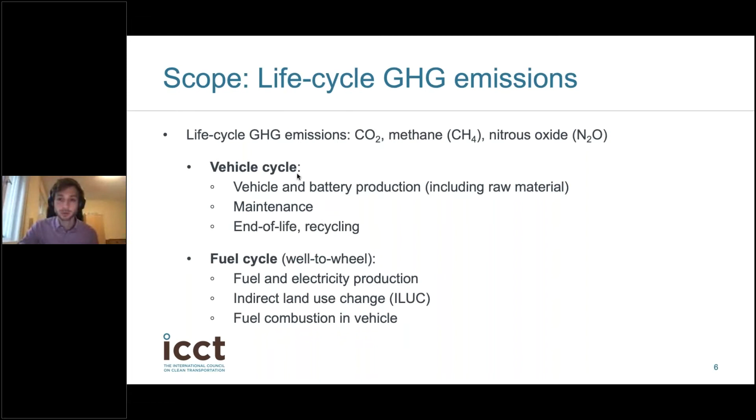And here we consider the improvement of the electricity mix that would result from a policy that would be aligned with the Paris Agreement of limiting global warming to 1.5 degrees C. So these are the best case and the worst case scenario, and we always show a range of values corresponding to these best case and worst case scenario.

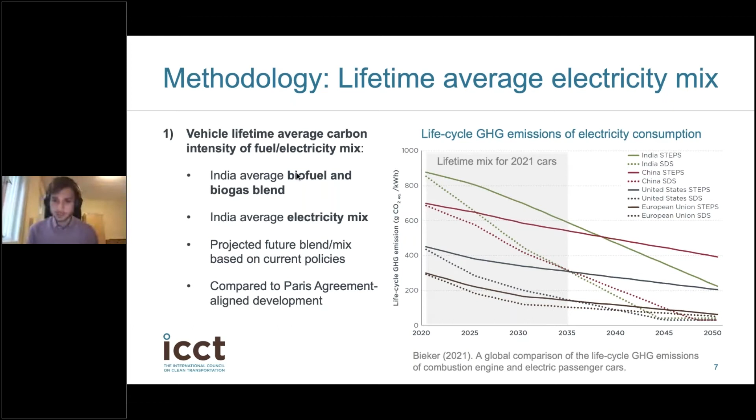And we do the same for the biofuel and biogas blend. Also here, we consider the improvement of the average blend of biofuels and biogas in India. And that brings me to the second point. When it comes to biofuels, it's important not to only look at the emissions of producing these fuels, so the direct emission of producing these fuels. It's also important to look at the indirect land use change emissions.

And for India, and for the future mix in India, we considered the improvement of the average gasoline and diesel blend according to the 2018 version of the National Policy on Biofuels. And in that version, the policy was focused on non-food-based biofuels. I'm not an expert on this, but I heard that there was some changes lately. Maybe we can discuss this later. But here we still consider the 2018 version. So we have for India assumed high shares of sustainable biofuels.

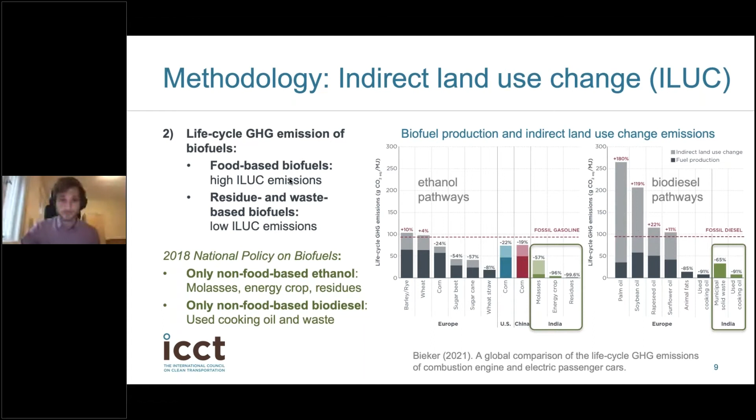The third point is the battery production, and here our data is lower than in comparable earlier studies, because we use the most recent data, which is based on industrial scale battery production, instead of estimations that are only based on pilot plants on battery scale production.

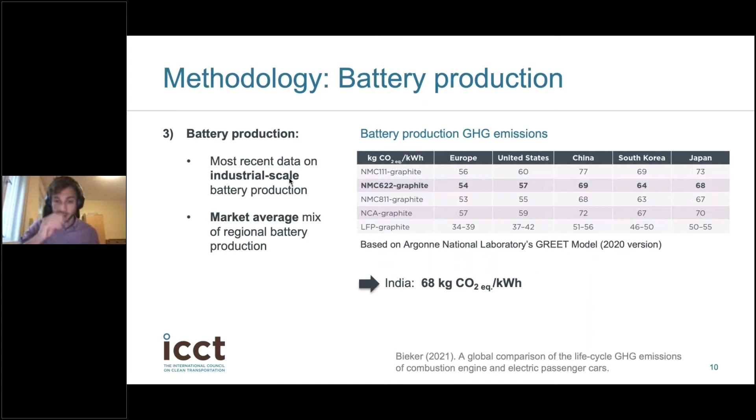The last point on the methodology is that we consider first methane leakage from natural gas and natural gas-based hydrogen pathways, which are blue and gray hydrogen. And here we consider that methane generally has 30 times higher global warming potential than CO2 when you account for a 100-year time frame.

But when you only look at the short-term 20-year time frame, the global warming potential of methane compared to CO2 is even higher, 3 times higher than for the 100-year time frame, and here it's like 85 times higher than CO2. So even small emissions of methane have a big impact here. So therefore, it's very important to look at the methane leakage emissions.

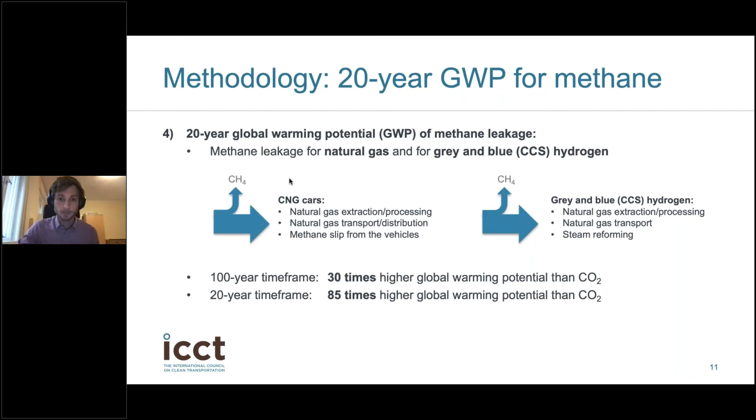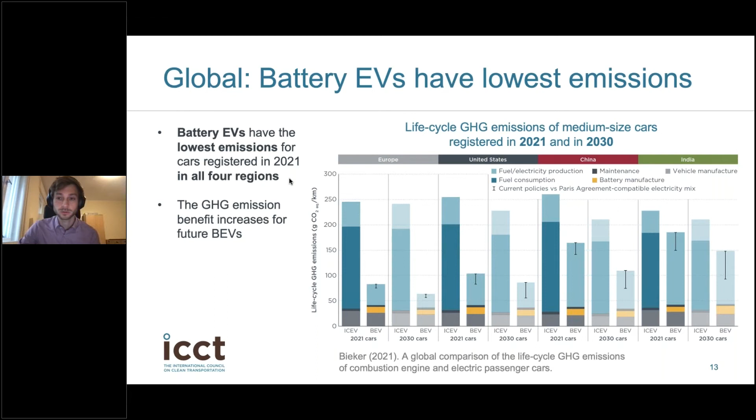When it comes to hydrogen powered fuel cell electric vehicles, it really depends on the kind of hydrogen you use. So you can use coal hydrogen or natural gas-based hydrogen. You can use natural gas-based hydrogen combined with CCS. You can use hydrogen produced from renewable electricity. Here I showed the 2 main pathways, which is hydrogen produced from natural gas, which is called gray hydrogen, and hydrogen produced from renewable electricity.

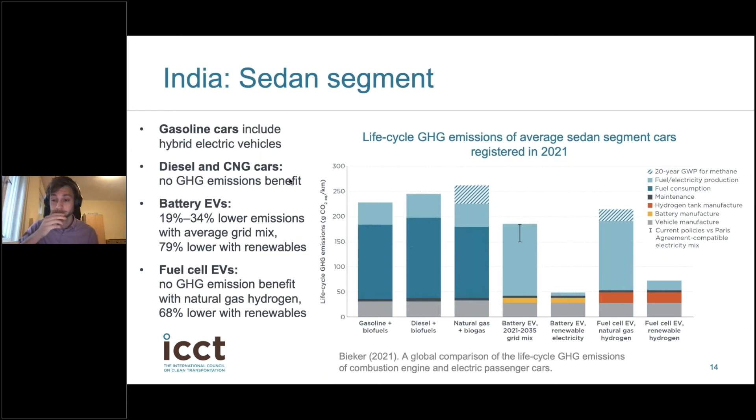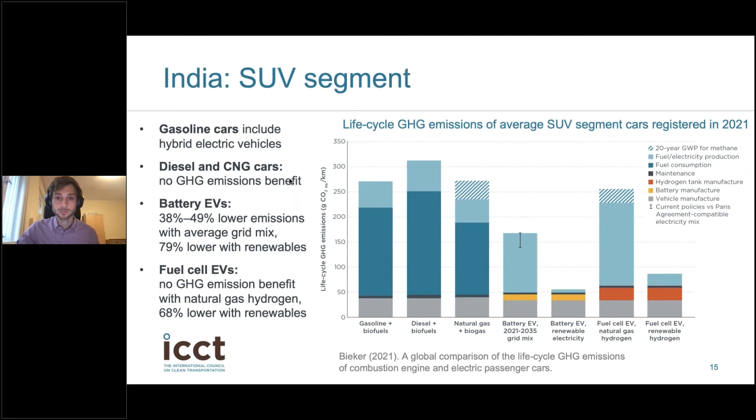So that might be surprising to some of you because hybrid electric vehicles usually show a higher reduction in fuel consumption on the paper, but in real world driving we found that the difference between the real world fuel consumption and the official test values is higher for HEVs, and that reduces the benefit a bit. But still, we can see a significant benefit. It's like 20 to 23% lower compared to conventional gasoline cars.

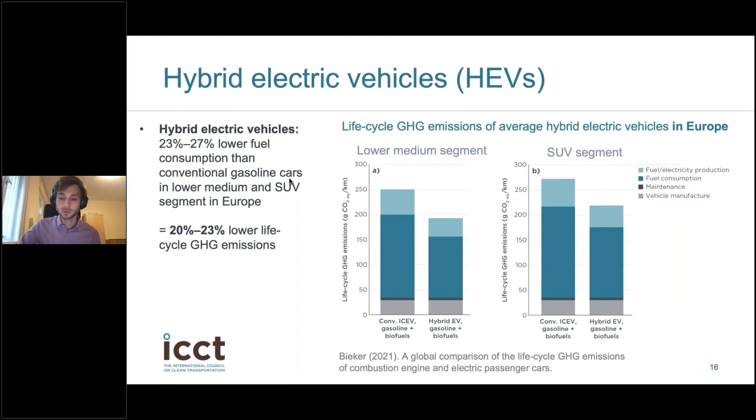And when we look into the future and we project how cars will look like in 2030, we see that for gasoline cars, the life cycle greenhouse gas emissions are lower than the numbers we had before. This is mainly due to the increasing share of sustainable, we assume this is only sustainable, ethanol in the average gasoline blend. And you can also see that for diesel and natural gas, you have lower greenhouse gas emissions than for cars today. But at the same time, you can see that the reductions are not that high actually. So we have 10%, 20% lower emissions, but not a large scale reduction.

This is different for battery electric vehicles. Here you see that for cars registered in 2030, we have 30 to 56% lower greenhouse gas emissions, which is an improvement. But you can also see that the range of uncertainty got bigger because the more we look into the future, the harder it is to see how the electricity mix will look like. So the truth will lie somewhere in between, we expect. And for natural gas and green electricity derived hydrogen, you see more or less unchanged figures here because these are just the pure pathways and not mixtures presented.

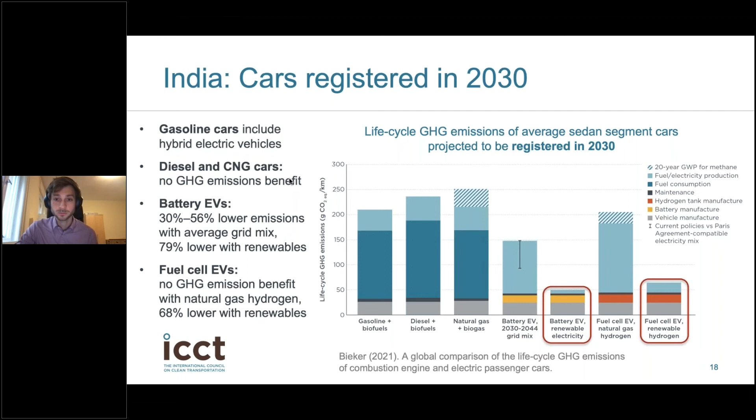But I want to compare the two of them a bit more in the next slide. And this next slide is about the energy consumption or the energy demand of these pathways. And here you see that when you produce green hydrogen from electricity, you have some inefficiency in this electrolysis process, but then you also need to compress and also transport the hydrogen, and then in the end you put it in the car and you need to re-electrify it, and also there in the fuel cell you have some energy losses.

And taken all together, the energy losses from hydrogen production, from transport and processing, and then finally the energy losses in the car from the fuel cell, you need 3 times more of the same electricity compared to battery electric vehicles. So in a world where we are limited with renewable electricity, it's important to consider this difference in energy intensity.

And then on the very, very right, you can see like a worst case scenario for this, which is the use of e-fuels. So e-fuels are produced from renewable electricity-based hydrogen and CO2 taken from the air. And this production process is very energy intensive. And then when you combust these fuels in the car, you have a very low efficiency compared to electric powertrains. And therefore you would need in the end 6 times more energy to drive the same distance with a similar car compared to electric vehicles.

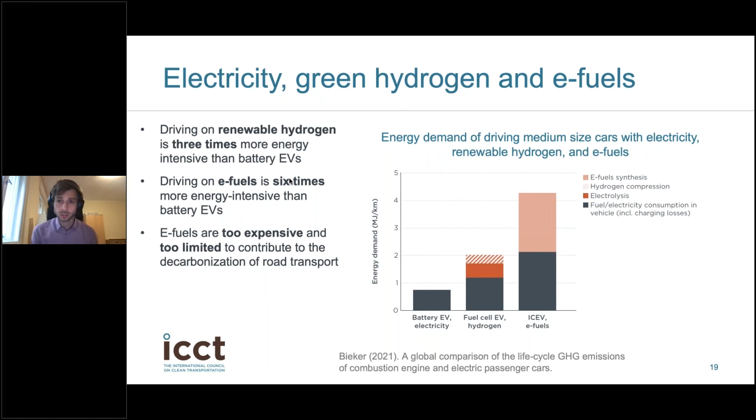Yeah, and here's a slide on motorcycles and scooters. You basically can see that all the results we see for passenger cars are also true for two-wheelers. So also here, as we can see on the left, for two-wheelers registered this year, we have significantly lower greenhouse gas emissions for electric motorcycles and electric scooters compared to combustion engine versions. And when you look into the future for scooters and motorcycles registered in 2030, you can see that this benefit increases. But you can also see that there's a slight improvement of the gasoline versions because of the higher share of sustainable ethanol we assumed.

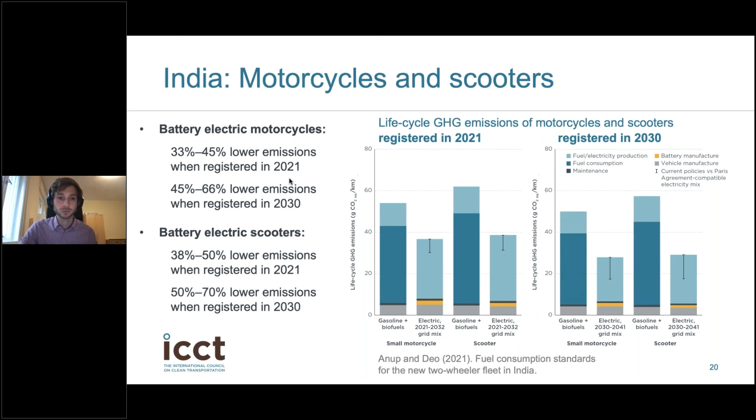Yeah, this leads me to the key messages. First of all, we found that for all 4 regions, including China, India, Europe, and the US, battery electric vehicles show the lowest life cycle greenhouse gas emissions when you consider their whole lifetime and not only look at the first year. Then we also see that when looking in the far future, only battery electric vehicles and hydrogen fuel cell electric vehicles have the potential to be near zero carbon, also on a life cycle basis. And we also see that there's no realistic pathway to decarbonize combustion engine vehicles.

So for e-fuels, I explained that in quite some detail, that they are too expensive and therefore projected to be too limited, but also are very inefficient to produce. And the same or a similar thing is true for sustainable biofuels. The more you want to produce them, the more expensive they are, and also here we have a limited availability. There's only so much you can produce sustainably. It's easy to scale up corn-based ethanol production, but this kind of ethanol does not provide large greenhouse gas emission reductions on a life cycle basis. You need to focus on sustainable biofuels, and here the supply is limited.

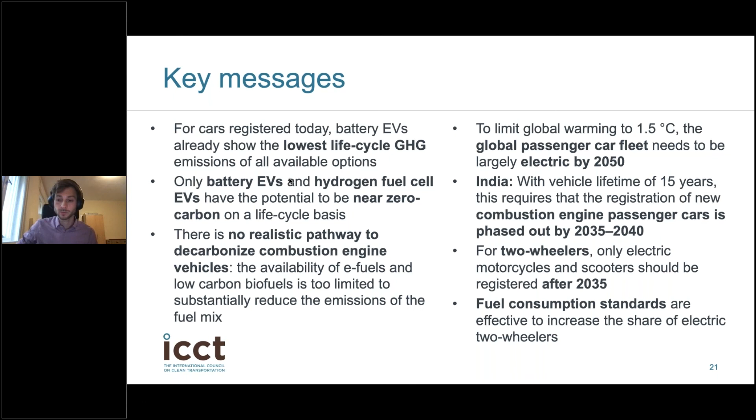The same is true for two-wheelers. Here it's even easier to electrify, and therefore we should start doing this earlier. And here there should be no new two-wheelers powered by gasoline on the road starting from 2035. And to approach that goal and to continuously increase the share of electric two-wheelers, fuel consumption standards are a very good way to go. And that's it from my side.